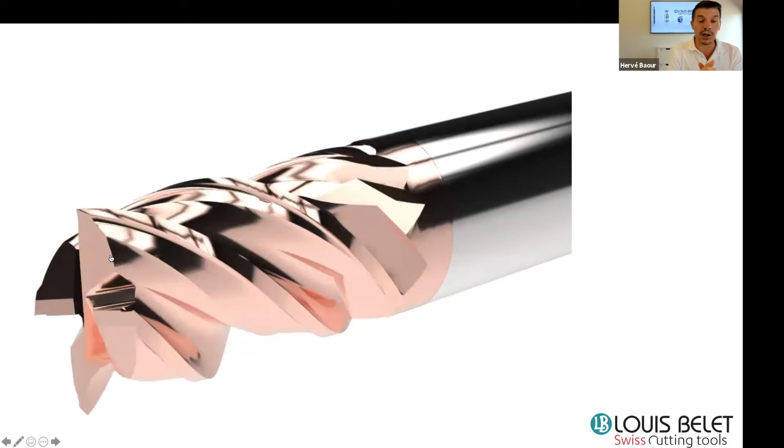So we took everything we had in mind in hand in order to define what could be done to achieve this challenge. We focused on shiny flutes, sharp edges, edge preparation on the side, and a completely dedicated coating for stainless steel, and this led us to this kind of tool that you can see rotating in front of you.

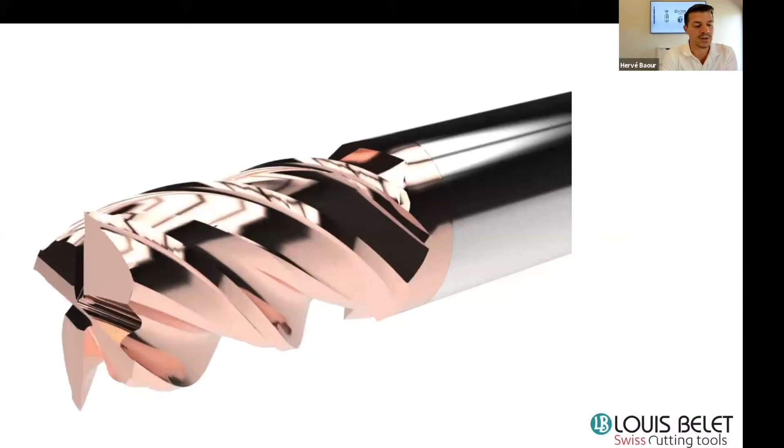In our portfolio, you will find it standard in our list of products, starting from diameter 2 up to diameter 12. The cutting length is generally 2 times D.

As I mentioned before, the industry asked us how we could minimize this finishing share or rate. So I will open a second poll, which will ask you how much of your cost is the finishing operation - is it a large part of your overall cost?

As I said, if you want to have a minimum time for finishing or polishing, you need to have a perfect milling surface state. We had, for instance, customers with up to 50% of their total cost used only for the finishing or polishing operation. And the more you polish, the more you round the edges of your part, and this is definitely not what you would like to have.

All right. So we will go deeper in terms of cutting speed and cutting operation. But before doing that, I need to mention that today the modern machines, or all machines, are precise.

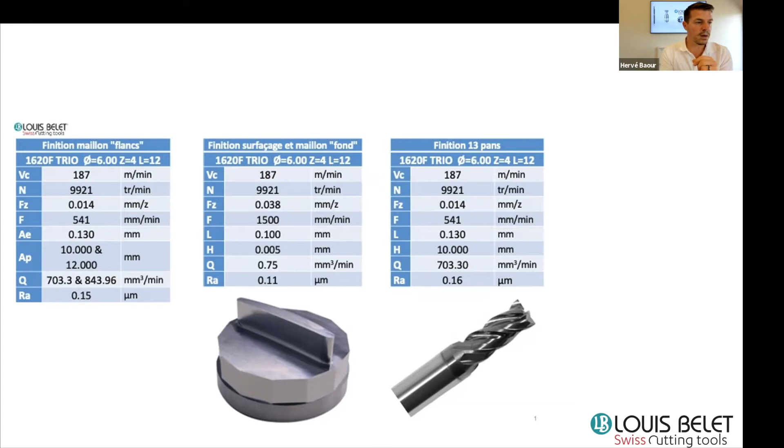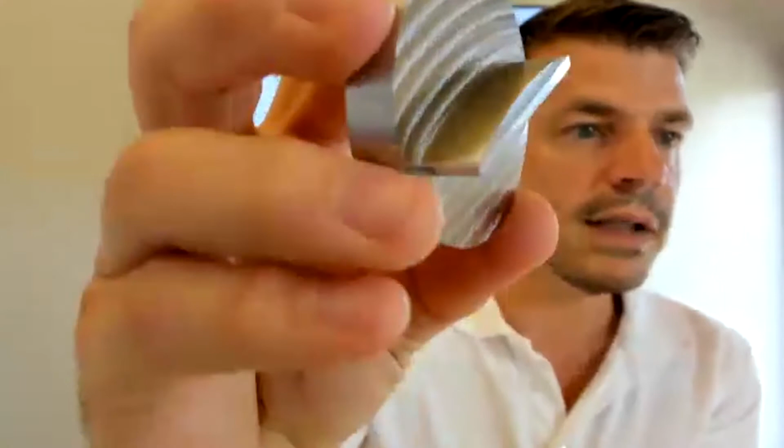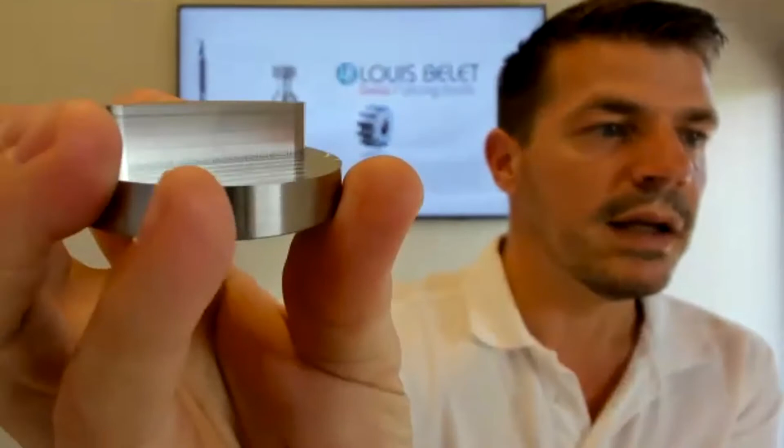So I can show you now how the part looks in real life. You can see the finish was made really with this tool, and I can say that it's really shiny and really impressive in terms of roughness. We will come back on this pretty quickly.

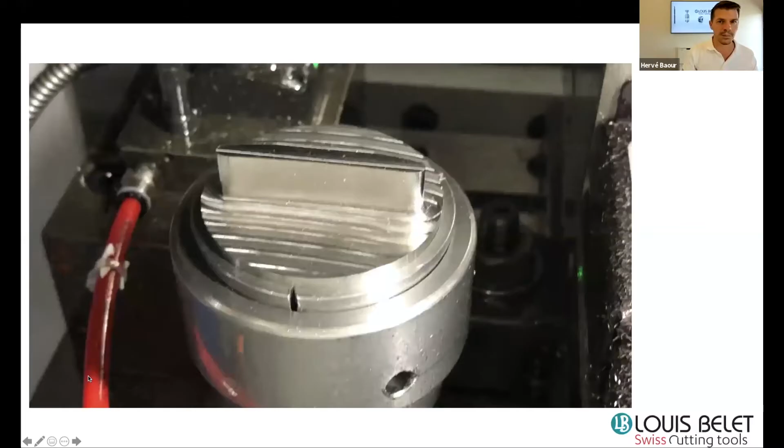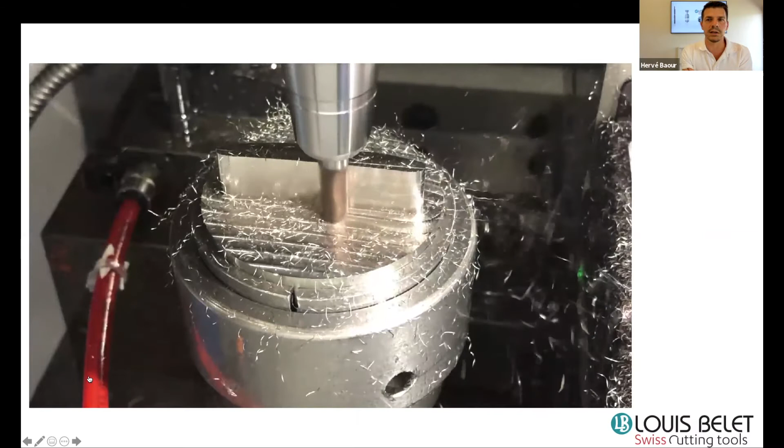What I will show you now is how it was done and how it looked. So you see the cutter working around. You see the difference between the pre-preparation, or pre-milling, and the finishing. You can see it maybe the second time - once the end mill is passing over the face, the face is looking much brighter, much shinier.

So the parameters we use - the set - are something like 180 meters per minute, which gives us a revolution speed of 10,000 RPM with a feed rate at 550 millimeters per minute. And the tool used there is our 1620F with a diameter of 6 millimeters.

We can see the contouring machining of the part, and the chips are well fragmented, so the chips are really small. What we didn't put here was a lubricant, on purpose, so that you can see the machining. And what you can barely hear - maybe I can put it louder - while machining, the sound is okay. It doesn't make a lot of noise or a lot of vibration, which indicates at first sight that the machining is doing okay.

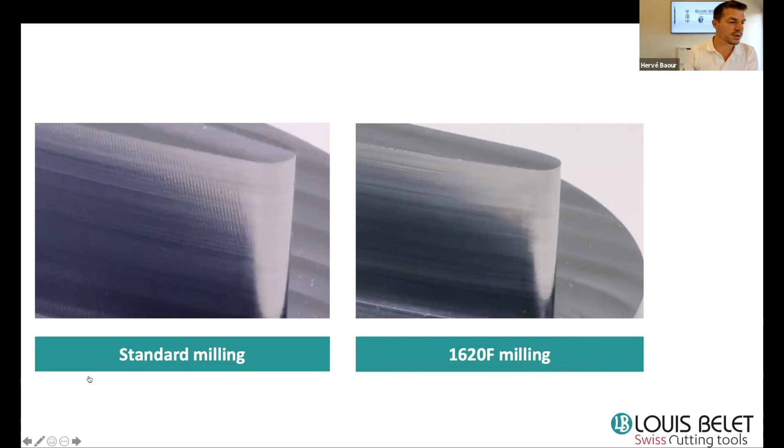You know us as a supplier of solutions, and we do have these standard tools. But of course, we can take all the advantage of this standard tool with custom geometry or custom shape tools.

Yes, of course, you can have, for instance, as you can see on the slide, a special dedicated geometry that you would like to see, and we can implement the coating, the edge preparation, and all the details that were developed for this tool to be put on this kind of tool.

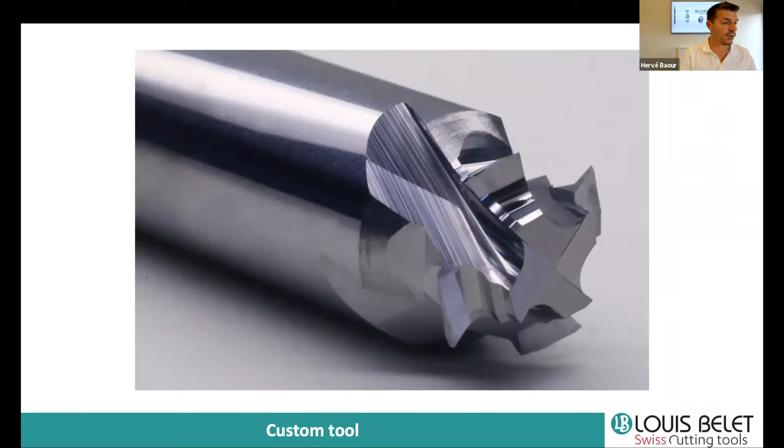It drives me to the last poll, and the last poll is about the material. So I would like to know what kind of material you do machine. We are talking here about a tool for stainless steel, but what other material would you like to see for this kind of tool? We know titanium is widely used and more used in different industries. Let's see what the poll gives you as an answer.

I think we make more or less the round of the subject. So I don't know if you do have some questions. Let me see if I get some questions.

I do have two or three actually. So the first one is: is a semi-finishing operation mandatory to use this tool?

This tool doesn't really need a semi-finishing operation. Of course, it is meant to be used as a finishing tool, so you better have a geometry near to the end dimensions. But having an over thickness of 0.05 or 0.1 should be something correct or coherent with what you need in order to have the best finish of your end parts and surface. So I hope this answers the question.

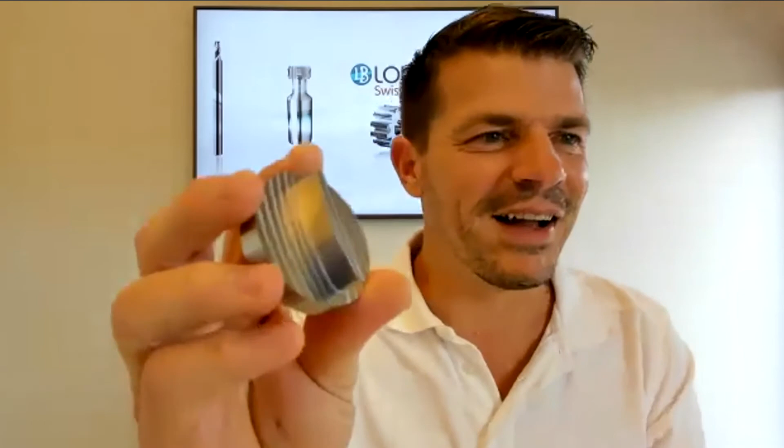Another question: does it produce burr on the corners? That's a good question. It depends on what you call burr, because I don't know if you can see it, but it wasn't touched, it's difficult to see. You feel that it's sharp, and sharpness and burr are sometimes really close. It doesn't cut you, so it is regular. I would say if there is some burr, it's really limited. Even under the microscope you do not see a lot of irregular, non-flat surface. So I would say rather no, but I can't say 100% sure it will not create a little burr.

What it could also do is, the thicker or the more material you cut, so the bigger the AE, the more burr it will create afterwards.

The last question is, what tool life can be achieved on stainless steel material in terms of meters? This is a good question, I do not have the answer handy. What I can tell you is this was shown at an exhibition. We had a small machine machining this part, and I'm not 100% sure if we changed the cutter or not, but during the whole week we produced with, I would say, the same cutter.

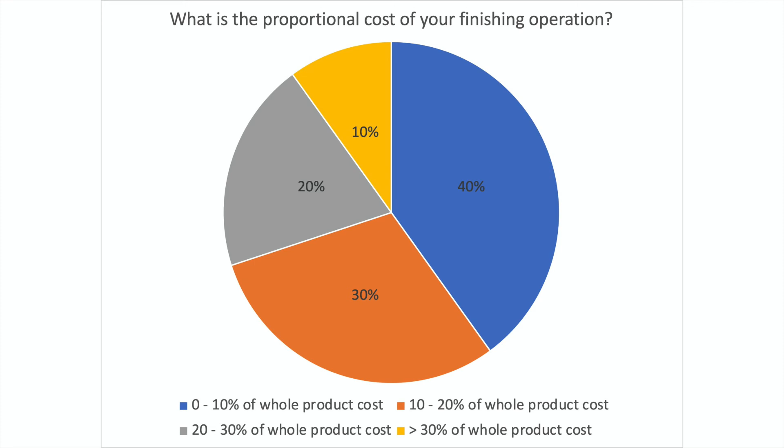Second poll was: what is the proportional cost of your finishing operation? 40% answered from 0 to 10% of the whole product cost, 30% from 10 to 20%, 20% from 20 to 30%, and 10% above 30%. So you see, we have about 30% who have some issues with the cost of production for this finishing part being more than 20%, which is pretty high.

For the last poll about the materials you machine: steel and titanium. Titanium has the highest rate with 69%, then steel with 62%, aluminum 38%, non-ferrous material 31%, precious material 15%, and composite 8%.

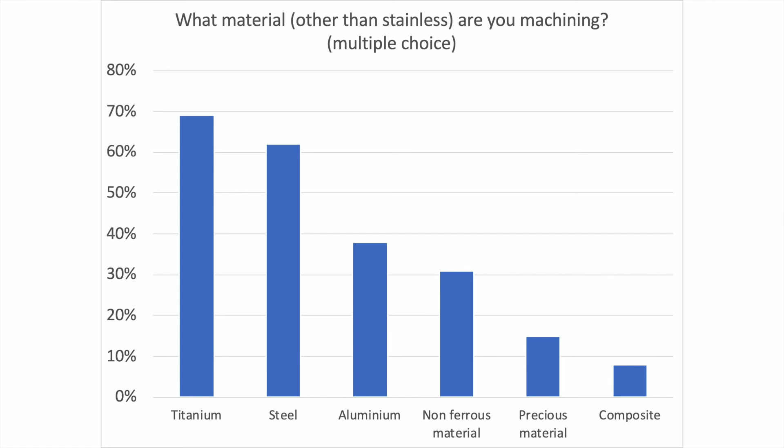It's kind of interesting information that you shared with us. It will also guide us for future development.

I see maybe one or two other questions before closing the webinar. What is the order code for this item? It is the 1620F series. I can send you the data sheet with the detail of the diameter to all of you who followed the webinar. So that I do not forget, I'll write it down: data sheet, okay.

Can you explain how trochoidal milling can be used? Do we have any impeller machining taper end mill? I think that once again, this tool is not meant for really going into the material and doing a shape like any other end mill. So I would rather use it as a finishing tool for contouring, not really for trochoidal machining. For this, I would rather use another series from us, maybe the 1620 for stainless steel or others. We can discuss — you can send me an email asking for other cutters for stainless steel or other materials.